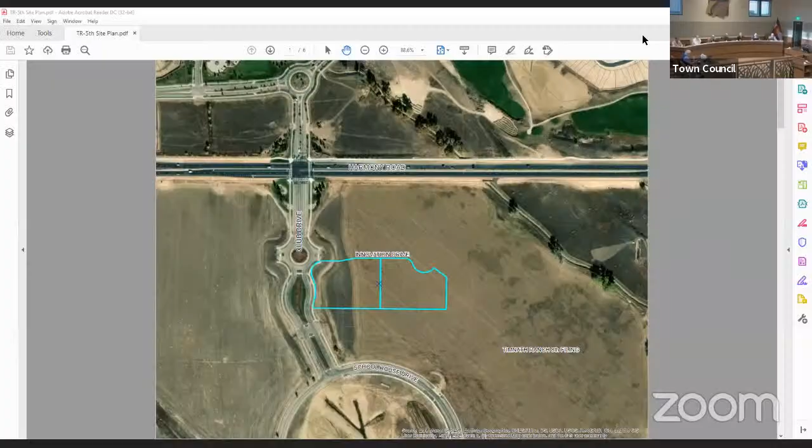So as you had mentioned, this is the Timnath Ranch 5th filing site plan. This site is actually located south of Innovation Place, there in Timnath Ranch, just east of Club Drive, south of Harmony Road, highlighted there in blue, just north of the Timnath Ranch 8th filing.

The zoning—excuse me, our screens, anybody screen on? No, that was on me. I forgot to hit the extend displays. All right, so I'll restart that. So it is south of Innovation Drive, east of Club Drive, south of Harmony Road, there on the north portion of the Timnath Ranch subdivision, just north of the Timnath Ranch 8th filing, highlighted there in blue.

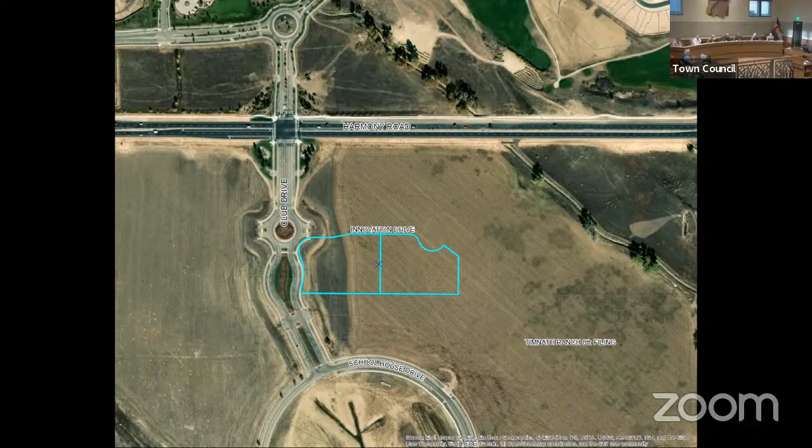The zoning on this is commercial mixed use. This site plan proposes 7 buildings ranging in size from just under 5,000 square feet to just over 11,600, and then just over 12,000 square feet on roughly 5.28 acres.

4 of the buildings will be 1 story tall, with the remaining 3 buildings being 2 stories tall. The buildings are intended to be utilized for medical and general offices.

The site provides just over 2 acres of usable landscaping and open space, which is roughly 38% of the site, which exceeds the 25% required minimum, and 5% usable landscaping within the commercial and Harmony corridor. Part of the usable open space per Harmony corridor standards is a plaza area on the west side of the site, which contains a seating wall, 2 picnic tables, along with pergolas.

The required parking for the site is 213 spaces based off of 5 spaces per 1,000 for medical, and then 1 space per 400 for office, with the breakdown for 23,600 for medical equating to 118 spaces. And then 1 per 400 square feet of office at just over 38,000 equates to 95 spaces. This applicant is providing a total of 212 parking spaces, which includes 9 handicap spaces and 2 electric vehicle charging spaces per code.

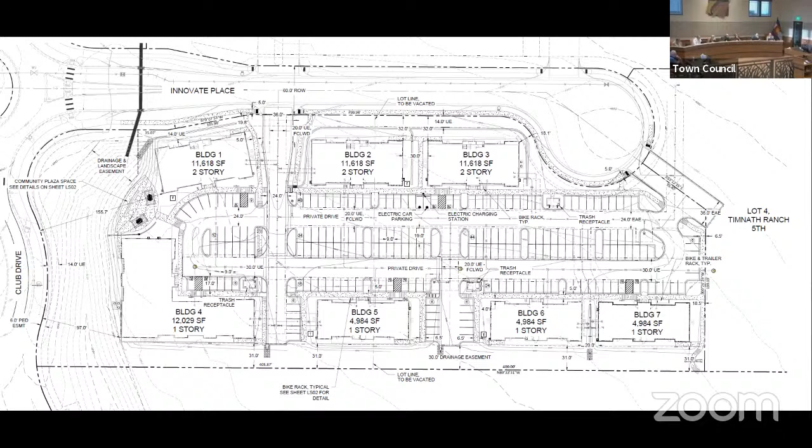The design review committee actually reviewed that and agreed with the applicant's request for a waiver from that requirement down to, I believe, about 38% transparency is what they are providing. So with that, other than that, staff has reviewed this against the rest of the land use code, found it in conformance with architecture, site requirements, utilities, and landscaping.

With us tonight is Courtney from TB Group, who has a brief presentation on her end. And then Courtney, if you want to just share screen, then you're good. You bet. Can you all hear me okay?

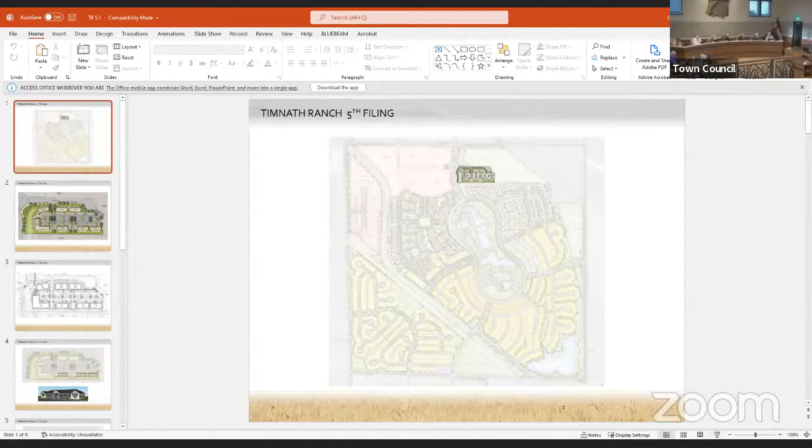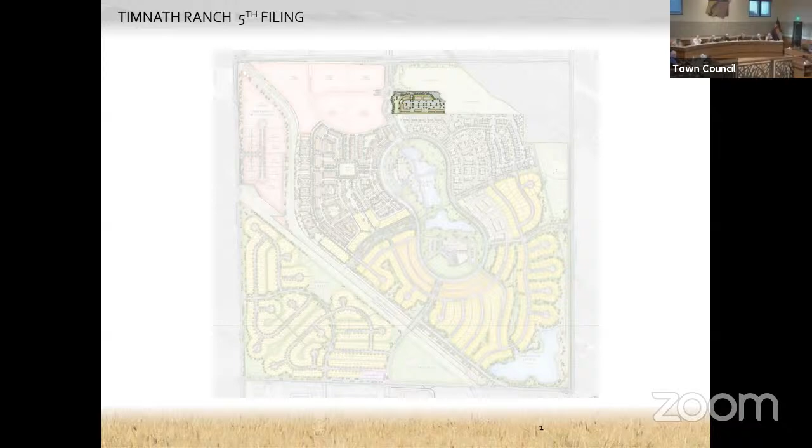Just to orient you, like Kevin said, we are on the northeast side of Timnath Ranch, just south of Innovate Place and east of Club Drive. We are zoned for commercial mixed use, and the lots to the north and east are also zoned the same. To the south, Timnath Ranch 8th filing is zoned multifamily. We think this is a really good project in a great location because of the connectivity it provides for everyone in Timnath Ranch.

As you can see here, we've got the landscaping. You get a really good feel for how much we've screened the buildings and buffered them. To the south of the property, on Timnath Ranch 8th filing, we've got a really nice buffer screening already provided, so our goal was to make sure no one from Timnath Ranch 8th would have any issues viewing these buildings.

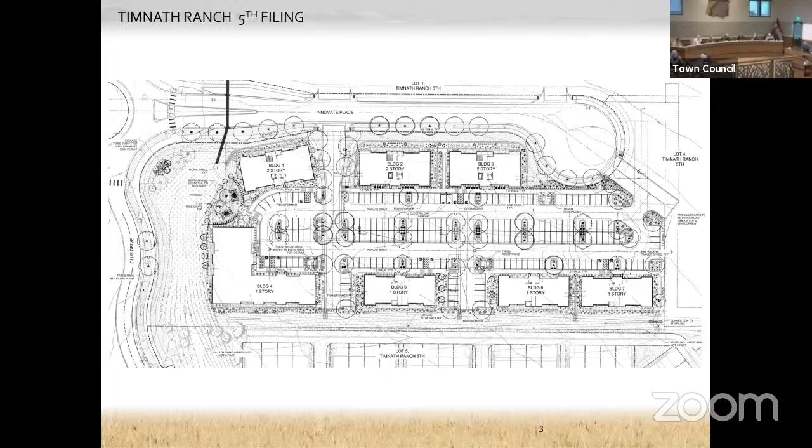I can try. I'm by no means an architect, but I'll give it my best. I also think John Mosier is in the audience with you guys tonight, so he may have a better idea than me, but I'm not totally sure. But I will start at least. So if I remember correctly—

I think he's got it, Courtney, in case you're not seeing him on the camera. Okay, no, that one's not going. We're trying to get the microphone adjusted.

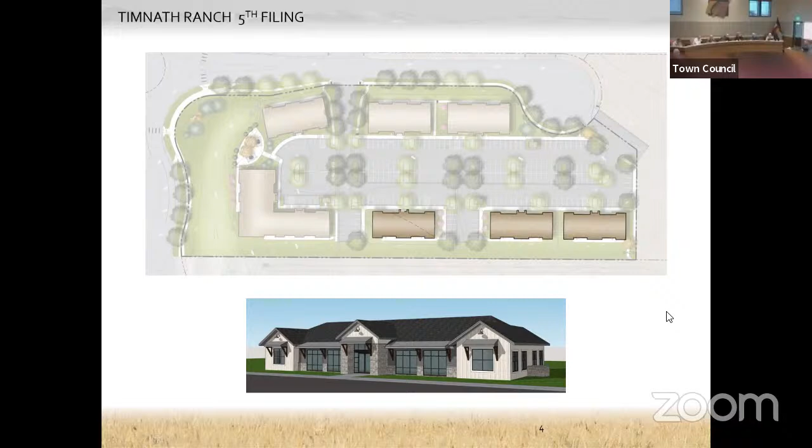Stop share. We did take that into consideration so that the back of the buildings don't look like typical commercial backs of buildings. They look more like a house would, a residential property. If you see, there's quite a bit of glass on the back as well.

So Tom, the second one down here, that's the south elevation. That's what you would see from the south side with that Timnath Ranch 8th. There's still 31% transparency with that, just with the windows and the glazing that they have there. It's really four-sided architecture all the way around. That makes sense.

One thing I've noticed in the commercial development just next to us here where Backyard Bird and Domino's are, we have a similar thing here, although what faces Harmony isn't quite as appealing as what you've done here. But on that one, I noticed something real prominent is the utility portal. Has there been any consideration here, and have those?

So the project to the north was actually done under different standards. That was when we had our interim standards. We didn't quite fully have a DRC putting together standards at that time, so that's why that one looks slightly different, with screening utilities and things like that.

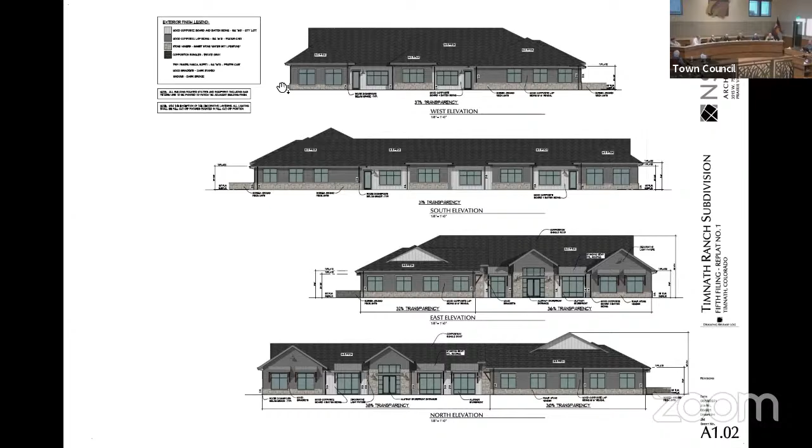The other thing I would share, I don't know if anybody was watching Tuesday night's council meeting. Council approved, I think it's called phase 3, an additional phase of programming for the community park -- the additional amenities. It's basically more amenitizing the community park. There's not a new phase, it's not an expansion, just additional amenities being programmed for the park.

Well, it was a splash pad, a basketball court which looks to me like almost a full-size court, 2 tennis courts, and near and dear to my heart, 6 pickleball courts. What, it's going to change? I quit -- 6 pickleball courts. So I'm anticipating the inaugural Timnath Pickleball Open this fall. Right, Don? Thank you very much, I accept.